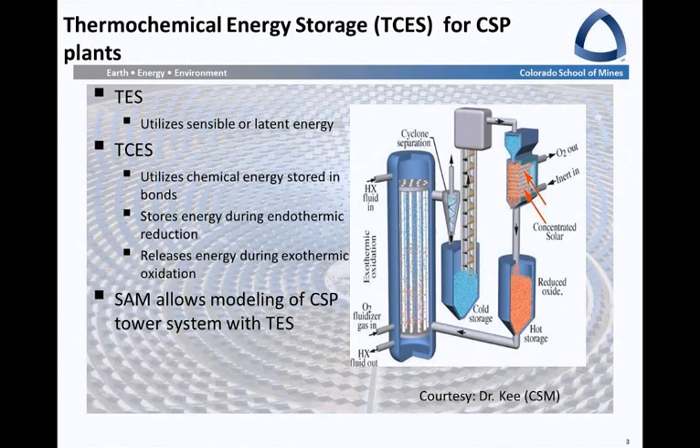So currently, the CSP power plants used across the globe utilize thermal energy storage, either sensible or latent energy. Thermochemical energy storage, or TCES systems, utilize chemical energy stored in bonds. The chemical energy is stored during endothermic reduction when the concentrating solar power is incident on the receiver, and it releases energy during the exothermic oxidation when we send it through a heat exchanger as shown in the figure. Currently, System Advisor Model allows modeling of CSP power tower systems with TES, or Thermal Energy Storage. So this presentation attempts the design of a CSP power tower system with a TCES system, trying to utilize whatever is available in System Advisor Model.

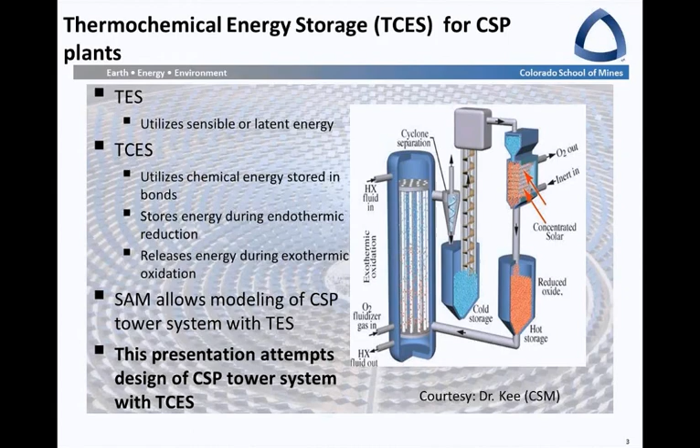So currently there are two methods used in System Advisor Model for CSP modeling. The first one is the generic model, where no fluid is selected as such, and the thermodynamic properties are defined by just the megawatt hour capacity of the fluid. The TCES-based system has lower dollars per megawatt hour than the TES-based system. This is basically the main reason why people are going for thermochemical energy storage systems.

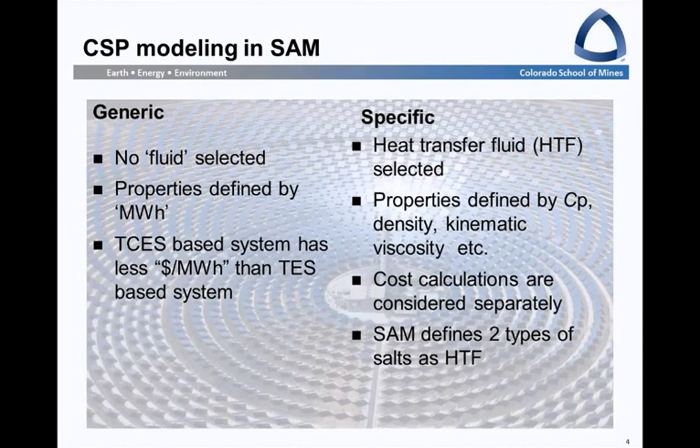The second model defined in SAM is the specific model, which allows us to define a heat transfer fluid or select a heat transfer fluid present by default in SAM. The properties are defined by the specific heat, density, kinematic viscosity, etc. And cost calculations are considered separately in SAM. System Advisor Model has two types of heat transfer fluid: molten salt, which is built into System Advisor Model, and it also allows a user-defined fluid as the heat transfer fluid. So now I'll discuss CSP with TCES using the generic model.

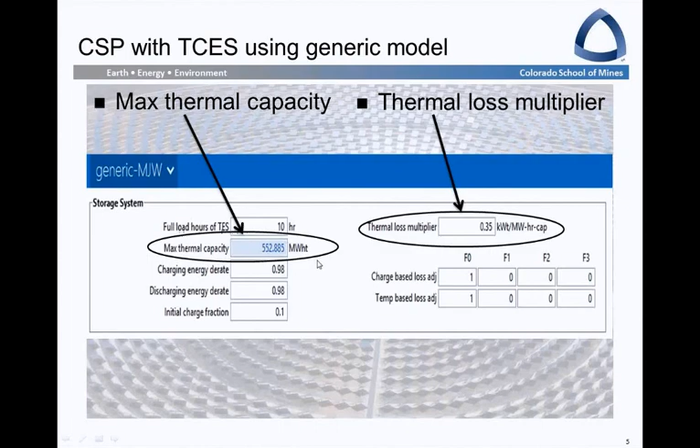As I said, the maximum thermal capacity and the thermal loss multiplier are the two main criteria that define CSP with TCES using the generic model. Here you can see that the total number of hours of thermal energy storage is 10, and I have defined the maximum thermal capacity based on the properties we have for the TCES material. The main disadvantage of this generic approach in SAM is that there is no control over the other thermodynamic properties of the heat transfer fluid. But the advantage is that it doesn't assume the flow type, the heat transfer, or the power cycle.

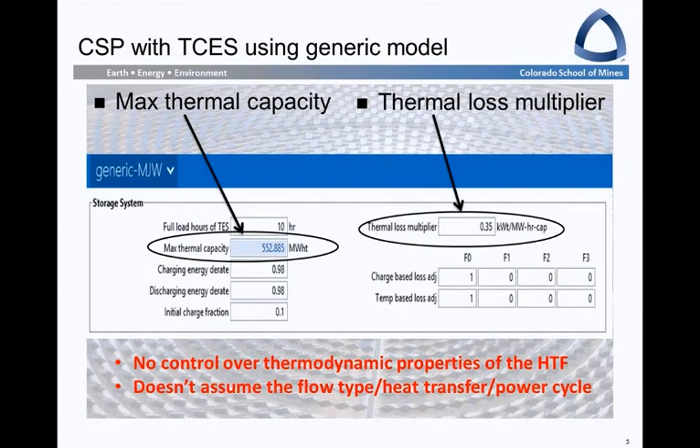If we go for CSP design with TCES using a specific model, then we are allowed to define a heat transfer fluid as shown in the figure, and this heat transfer fluid is defined in terms of the TCES material that we have. The second thing that we define is the HTF inlet outlet conditions, which are defined by the figure as shown below, that the inlet and outlet temperatures are varying for our kind of TCES materials.

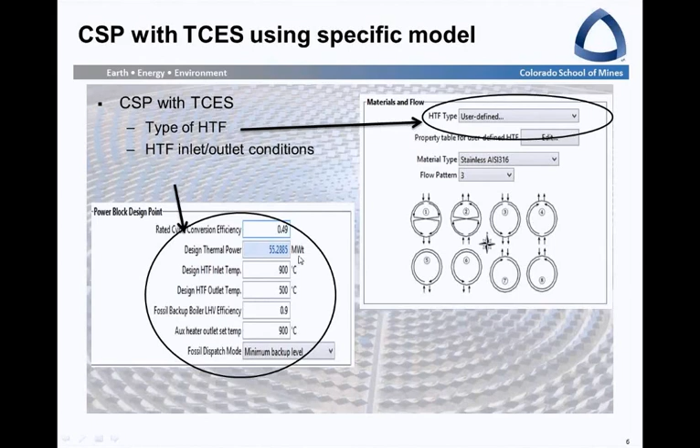For example, the inlet temperature is at 900 degrees C and outlet temperature is at 500 degrees C, while the rated conversion efficiency is 49%, which is for a supercritical CO2 cycle. So the advantage of a specific model is that it gives more control over the thermodynamic parameters than a generic model. So with this in mind, what we went ahead with is to design a 20 megawatt CSP with TCES and TES based system and compare their outputs using System Advisor Model.

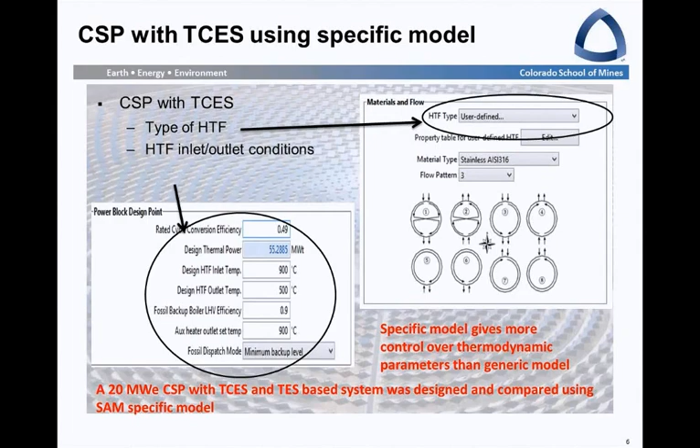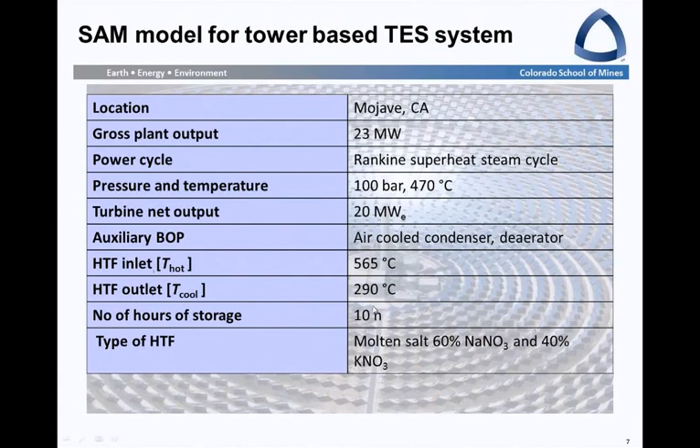So for System Advisor Model using thermal energy storage system, which is by default defined in SAM, it was as below. So I consider the general Mojave location in California for a 23 megawatt gross and 20 megawatt net output plant. Here the power cycle is controlled by a Rankine superheat steam cycle, and the pressure and temperature are 100 bar and 470 degrees C. The HTF inlet and outlet temperature are based on the heat transfer fluid of 60% NaNO3 and 40% KNO3, and the number of hours of storage are considered to be 10 hours of storage.

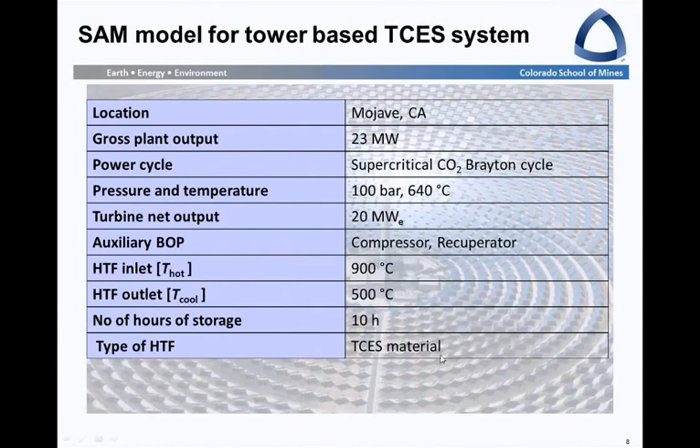Similarly, for a TCES based system, the electrical output and the gross output are considered to be same. However, the power cycle was considered to be supercritical CO2 Brayton cycle. The pressure was the same, that is 100 bar, but the operation temperature was 640 degrees C, which is the operation temperature to achieve a 49% efficiency. The auxiliary BOP actually consists of a Brayton cycle, therefore it consists of a compressor and recuperator, and the HTF inlet and outlet temperatures are based on the temperature defined for the heat transfer fluid for the TCES material. The type of TCES material is proprietary and I cannot give that information, but the thermodynamic properties are shown in the next slide.

When we ran both these models, we found out that the energy produced from a TCES based system was about 91% of energy produced from a TES based system. This gave us a conclusion that the current TCES materials that we were looking at were not sufficient even to achieve a grid parity for similar TES based systems. So further research is being conducted currently in the labs at Colorado School of Mines to find new thermochemical energy storage systems. The main challenges in the TCES design are something that I wanted to bring forward to all of the people here. So basically the system flow diagram is entirely different.

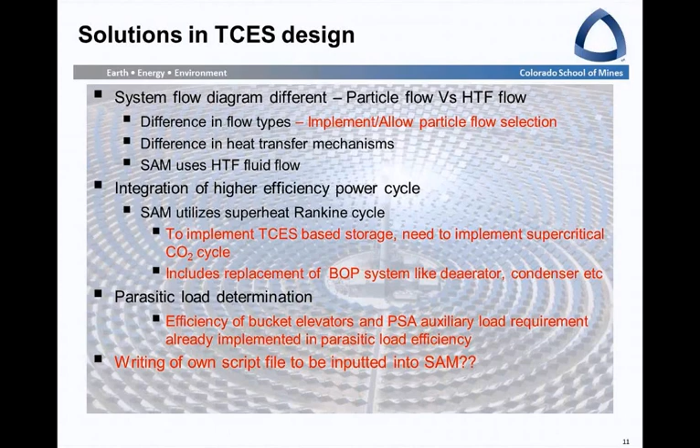In conclusion, an attempt was made to design the power tower with TCES systems using System Advisor Model. The design parameters in SAM that were used were effective specific heat, which was defined for a user-defined fluid. The parasitic load efficiency was changed, and the power conversion efficiency was different. Ideally, design parameters in SAM should allow the selection of particle-based fluid flow and implementation of other power cycles in order to implement a TCES-based CSP tower system entirely into SAM.

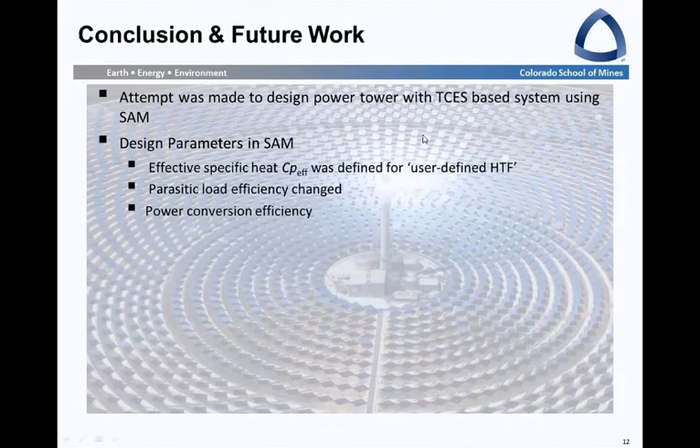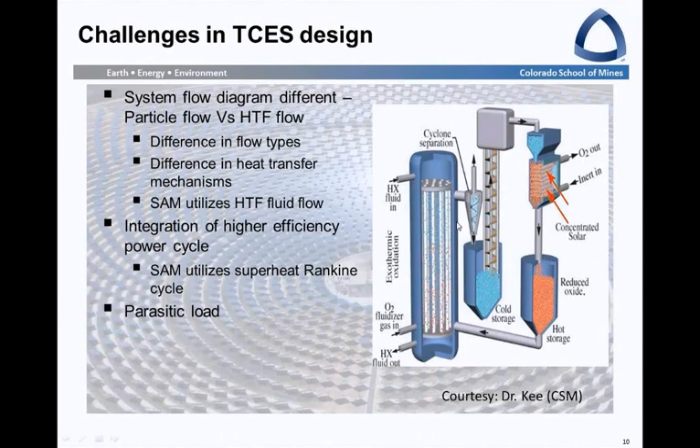Yes, I found it difficult, mainly because SAM only allows use of the Rankine cycle, and the Rankine cycle does not have the capacity to have these high inlet temperatures. So I could not incorporate a supercritical CO2 cycle just by changing the efficiency number. I mean, I did it, but the fundamental approach is wrong. So yeah, it was confusing in a way for me to implement this system. Right. So the actual CO2 cycle that you want to model would have a much higher inlet temperature than what you're able to model in SAM because you can't bump that up? Yes, that is correct. Okay, thank you.